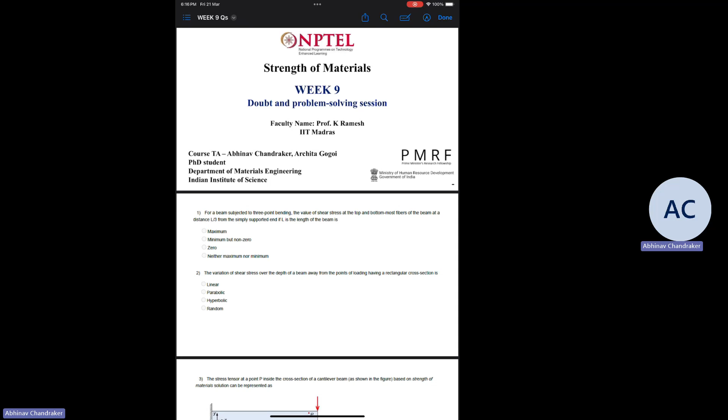In the previous week also, we had seen bending of beams. There we had understood what is the nature of the stresses which develop on pure bending. After that, we looked at addition of shear in bending because that is more realistic - that is what practically always occurs. And we saw how the stress distribution and the strain relationship look when you have both bending and shear.

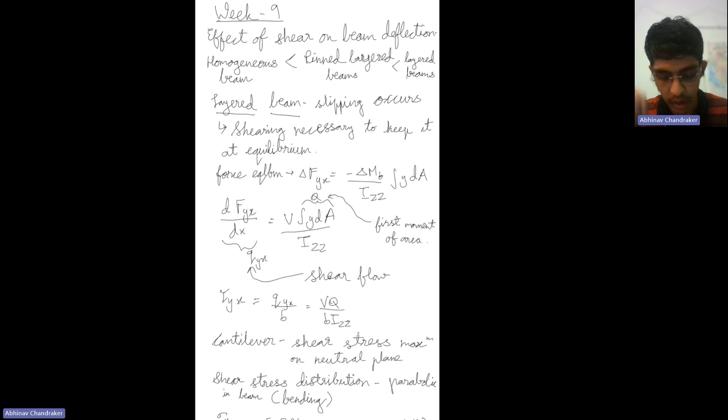There we could see that in case of a layered beam, that is, you have different number of layers all stacked one over the other, the deflection when the same amount of loading is applied is much more compared to a homogeneous bulk beam. If you do some pinning of the layered beams, the deflection is somewhat lesser than that of the layered beams. The reason we have this much deflection is because slipping occurs in between the layers.

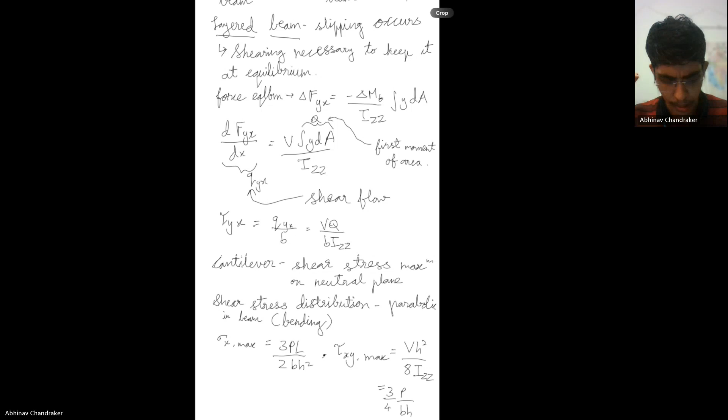We also saw it in the video of the loading which sir had shown. And when we try to look at the forces acting between the layers, it was seen that there is a shear force which is acting between the layers.

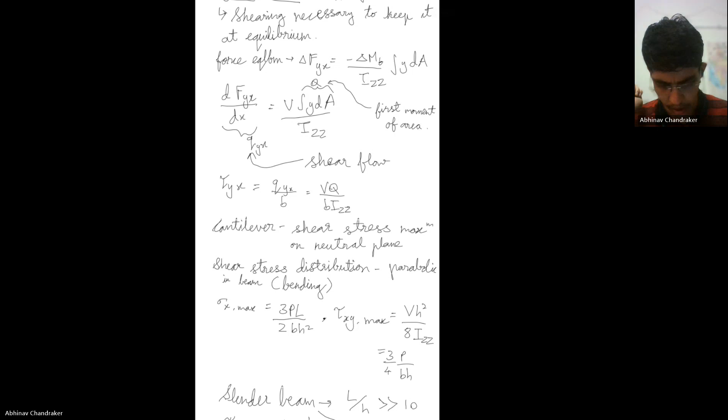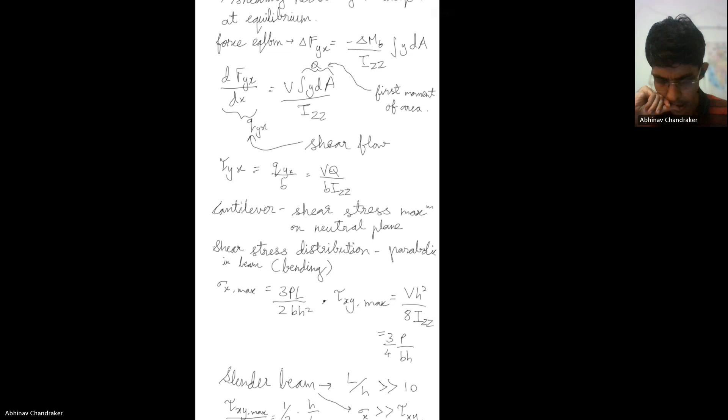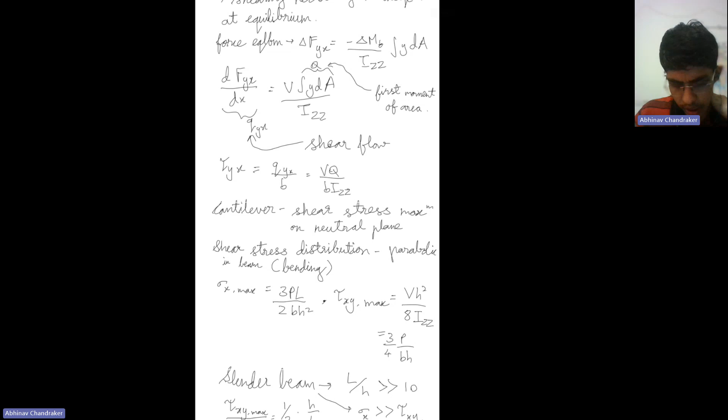It was mathematically quantified by looking at force equilibrium for that shear force. Here I have written down the final expression for the delta Fyx force acting on the y plane in the x direction, which is basically the shear force on a layer.

And it can be related with the bending moment value, Izz, and the integral y dA, which is the first moment of area. Finally, when we do some substitutions, we call dF by dx as q, which is the shear flow - so how sir linked it with the flow of material, how as you change x the force is changing.

And you can also write tau as q by b, where q is this shear flow here, and b is the width of the beam, and this will be equal to... just a minute.

Sorry, I could not write on it. Anyways, so I'll just magnify the concerned area.

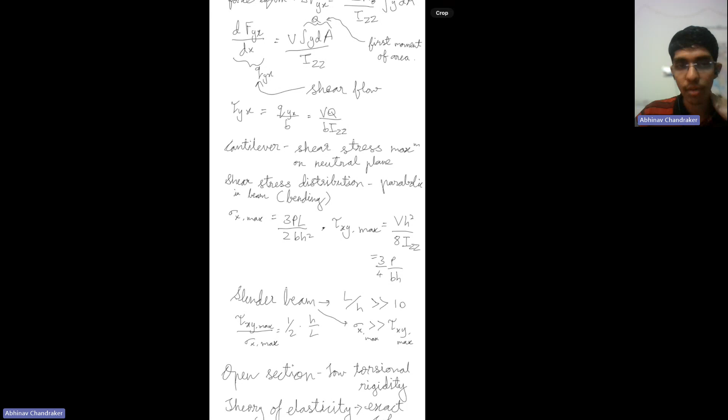So finally, we got this expression tau equal to Q by b, which can also be written as V into Q. V is the shear force acting at that point due to the loading. Q is the first moment of area, divided by b into Izz. I is the moment of inertia, second moment of area.

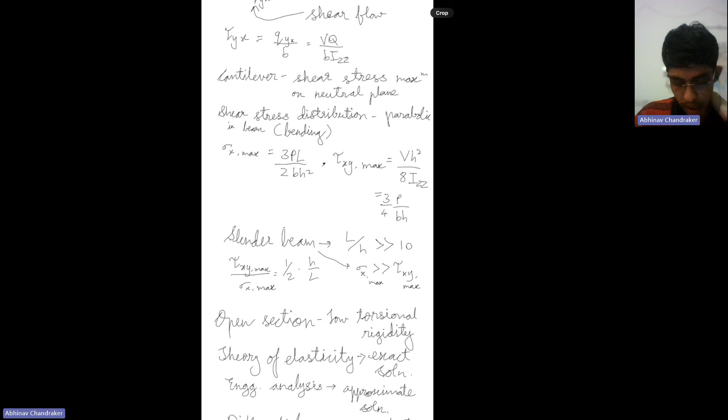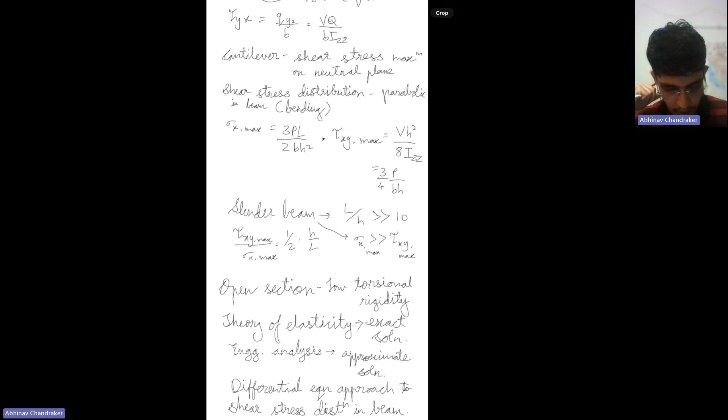So by this we see that in cantilevers we also have a shear stress tau yx, which is on the y plane in the x direction. And this stress will be maximum on the neutral plane. So before also, sir had told that the shear stress distribution will be such that at the surfaces it will be 0 due to free surfaces, and at the middle it will be the highest.

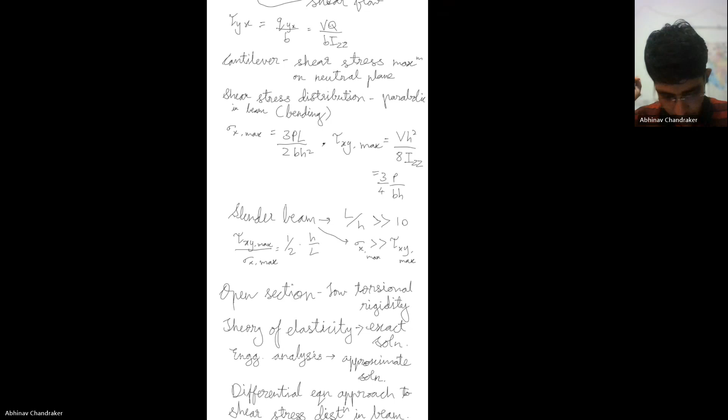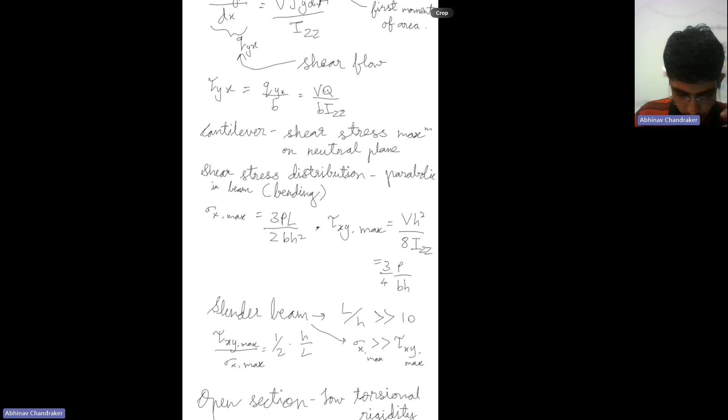And through this relationship, it's not written here exactly what is the relationship, but it's a parabolic relationship. So tau is proportional to the square of the y value. So as you go from the neutral surface or neutral plane towards the top or bottom surface, the value of the shear stress will reduce in a parabolic manner from highest to 0, and the highest value will be Vh square by 8 Izz, which is 3 by 4 into P by BH.

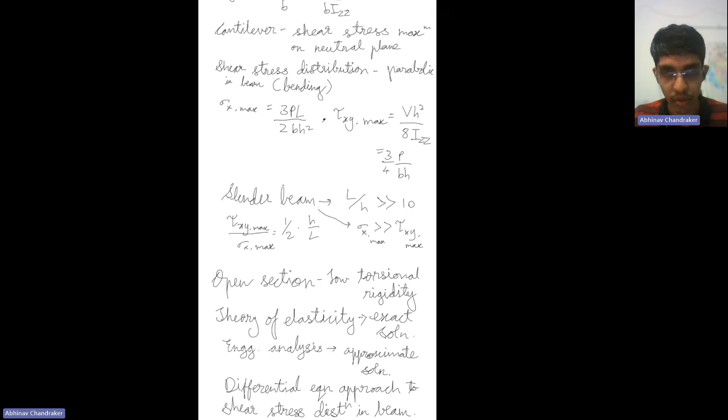So at the neutral plane, we know it's defined in such a way that the axial strain and axial stress are 0. But the shear stress will be highest on the neutral plane. So that you have to understand.

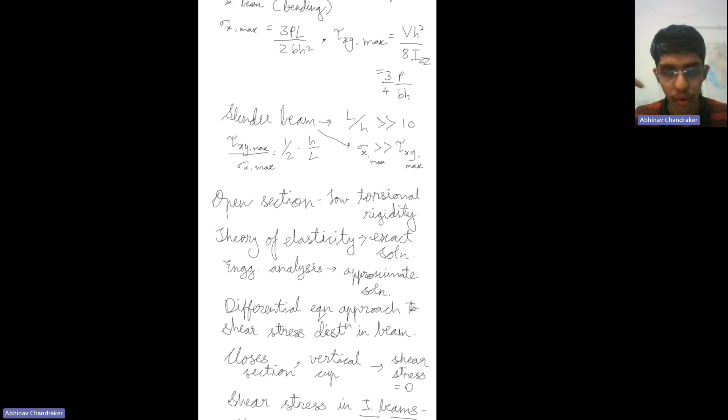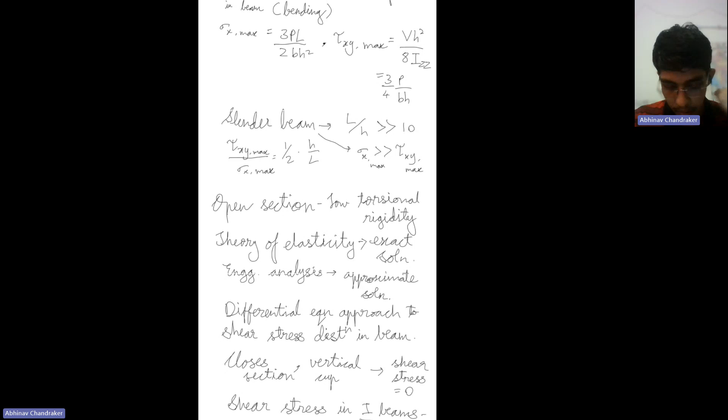And we know that we have all throughout made the assumption of slender beams, so L by H is more than 10. And if we try to take the ratio of the shear stress and the axial stress, it comes out to be H by 2L. So from this, what we can understand is that axial stresses are normally much more than the shear stresses for slender beams, and therefore in most scenarios, axial stresses are more important.

So there are certain scenarios where you have concentrated loads occurring, such as in 3-point bending tests, and near those concentrated loads, shear stresses can play a big role. They can influence the stress contours which are developed.

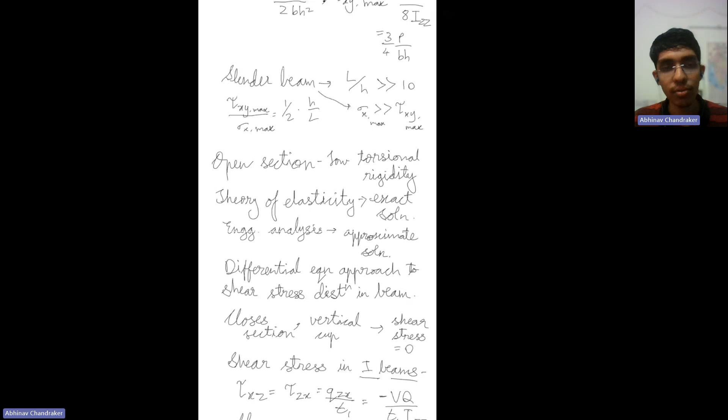Those kinds of sections are called open sections. And if you have something like a rectangular cross section, you call it a closed section. So till now, all this that we saw, especially the shear stress related observations, they were for closed sections. This will also apply to open sections, but in open sections there will be another kind of shear stress which will develop. So till now we were looking at shear stress between the layers, occurring between the layers between top and bottom. But if you have an open section...

Depending on how the section is, I'll try to just write it down. I'll make a rough sketch. So what I was talking about was, till now we looked at more symmetric sections, like maybe this kind of rectangular cross section, or an I beam which has a plane of symmetry, actually two planes of symmetry.

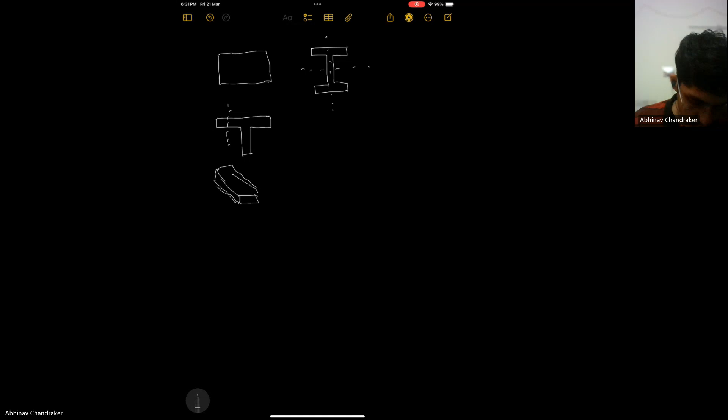But if you have something of this form, then in this case, what will happen if you make a vertical cross section, for example here, then you might have an element like this, or let me... it's difficult to draw actually.

If you do a vertical cross section of this, make a vertical cut, just like we had two different layers stacked horizontally one over the other. If you have them stacked vertically side by side and look at what happens for the closed section, you will see that it will still be the same when loaded.

But if you look at the open cross section and do this activity, one layer will try to shear past the other. There will be some movement occurring between those two, and that happens because shear force develops to maintain equilibrium, since here equilibrium is not maintained. So you have a net shear force developing, acting on this cross section.

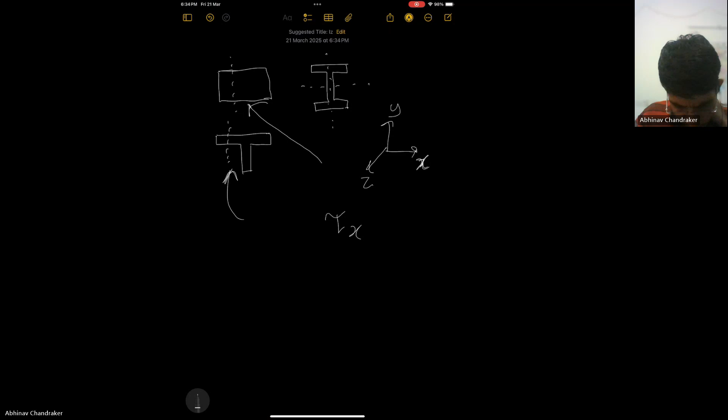Here I am just telling you, and to clarify a bit more, if you have x here as per Sir's notation, y here, and z here, that direction will be tau. So the beam is like this, and you'll have one shear in the x direction on the z plane, so tau zx.

Similarly, this will be the same as tau xz, on the z plane, x plane on the z direction. So these both will occur for this kind of a cross section.

Sir has told what will be the values for this based on force equilibrium, and it turns out to be qzx by T1 in I beams.

Also, I think I said it will be for this one, but it will also occur for the two plane of symmetry I beam, this is a half I beam. So this will occur for both of them.

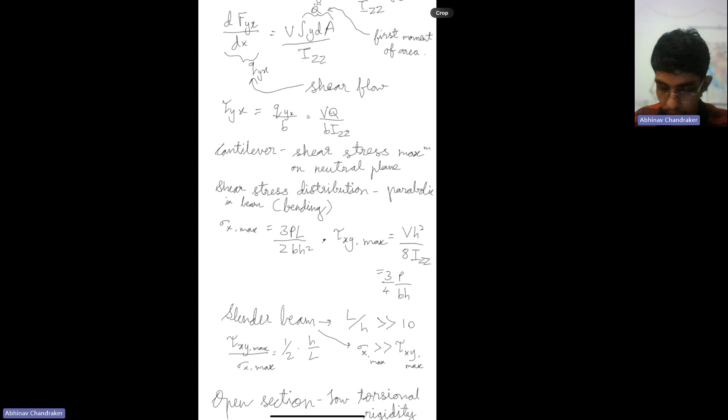We see that at the top it is very low near the flange area, and this is because the area of this is very high. So due to this, if we look at the formula, it's like this: VQ by b into Izz. So the moment of inertia is very high, so tau will be low, and you will have a very small value.

Both still show parabolic nature, so both of these are parabolic. But in the other portion, because the area is smaller and the Izz value is smaller, we'll have much higher tau values. So this is how tau xy will vary for open sections.

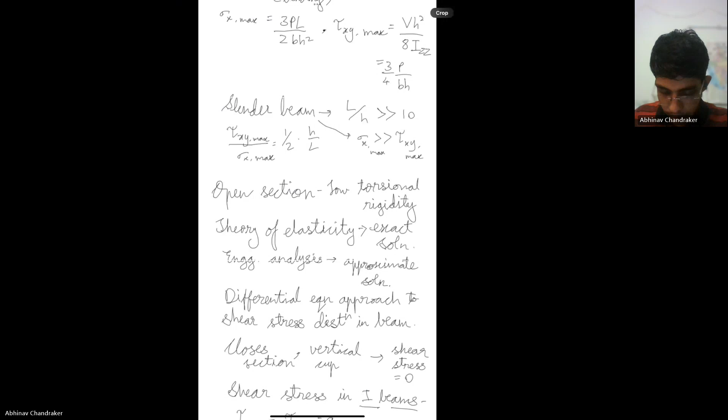All of this was from engineering analysis, which gives you a more approximate and quicker solution, but you can also get a more accurate solution by doing theory of elasticity analysis, which involves writing differential equations and seeing how stresses vary as strains in differential form.

That was also shown by Sir for one of the cases, and it was shown that both tend to give similar values, but in more complex loading, theory of elasticity gives you the accurate solution. So Sir multiple times mentioned that you need to also correlate with experiments which are carefully done, in order to show that your analysis is correct.

So, therefore, due to these stresses, if you have an unsymmetric cross section, something like this - this is the cross section, this is your beam - and you are loading it.

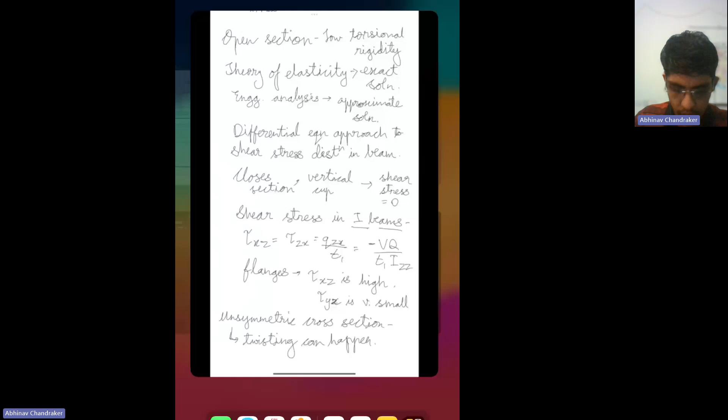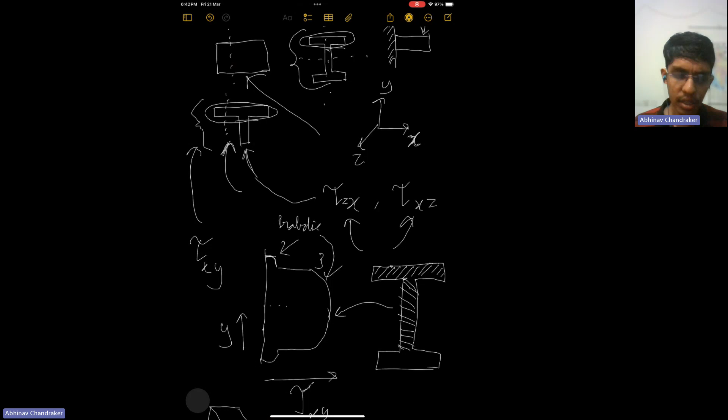So that was all which was covered in week 9, especially in lectures 4 and 5. In lecture 6, he covered some more specific cases like composites, and he solved some numericals and showed how you can develop the relations for composites.

And find out stresses and strains for particular questions. The important thing that you need to keep in mind from this lecture is that in your beam cross section at the neutral plane, you will have tau xy, shear stress, the highest, and the stress state will be 0.

Tau 0 in the 2D plane. Of course, in Z you will not have anything, and if you go near the top or the bottom surface, then you'll have sigma stress, axial stress as maximum, and you will have this kind of state, sigma 0 0 0, and the axial stress is there, no shear stress is present.

That was all from week 9, lecture bending 4 and bending 5. I think now we can move to the questions, since mostly bending 5 and 6 are about numericals for composite materials and different kinds of loadings having different materials of different cross section areas. But we'll just look at some non-numerical MCQs. Archita will cover the more numerical ones in her session.

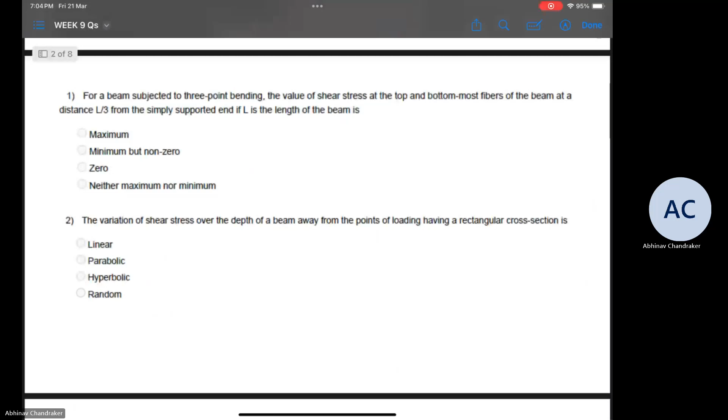So let's start with the questions. First question: for a beam subjected to 3-point bending, the value of shear stress at the top and bottommost fibers of the beam at a distance L by 3 from the simply supported end, if L is the length of the beam, is?

So we have 3-point bending here, but we can still simplify what is being asked in this problem. There will be certain shear stress and bending moment occurring at the point L by 3 mentioned here, in which we are interested.

But we know that tau xy, the shear stress acting on the x plane in the y direction, will be parabolic, and it will be zero at the surface, that is at the top and bottom.

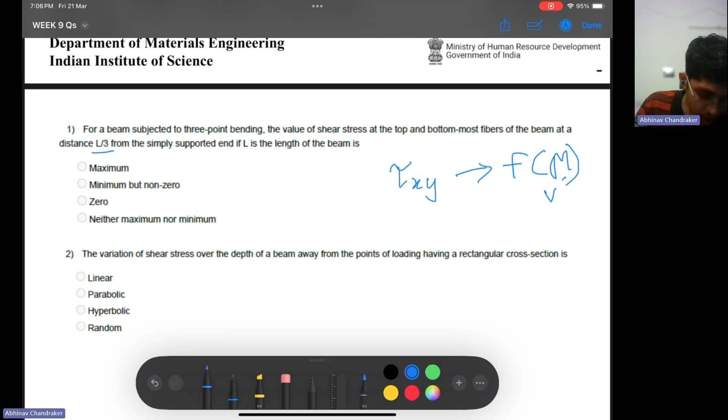Next question. The variation of shear stress over the depth of a beam away from the points of loading having a rectangular cross section is?

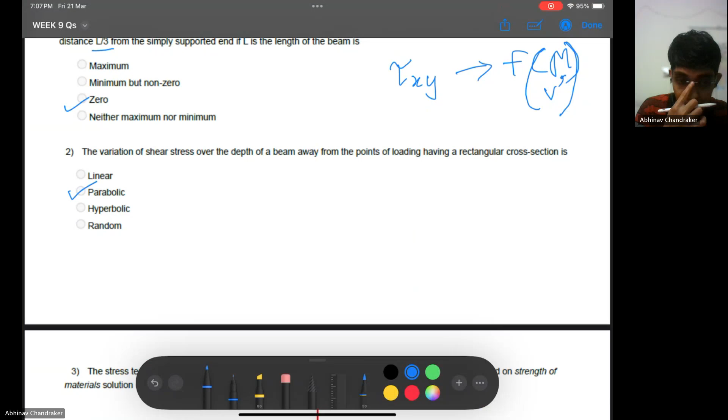So we have seen this also. The relationship is parabolic. The exact relationship you can check in sir's video lectures. It is somewhat proportional to h by 2 whole square minus y square. So at y equal to h by 2, it is 0.

At y equal to plus minus h by 2, tau equal to 0, and at y equal to 0, here y is being measured from the neutral plane. So on the neutral plane, tau is maximum, and the relationship is parabolic, since you have the integral y dA by I term here. So if you simplify it, you will see that it is parabolic. Let's go to the next question.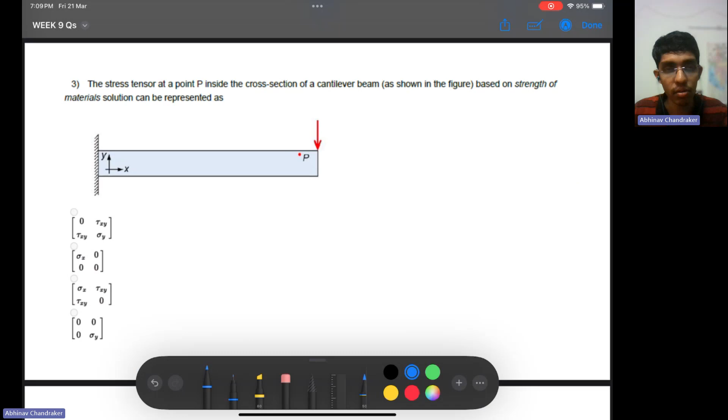So we have already told that at the top we have zero shear stress, in the middle we have highest, but in the middle, that is at the neutral plane, we have axial stress equal to zero, and in between we have both axial stress which varies linearly over y, and shear stress which varies parabolically over y. So the correct answer will be this: sigma y will be equal to 0 as per strength of material solution. Exact solution might have some value of sigma y also.

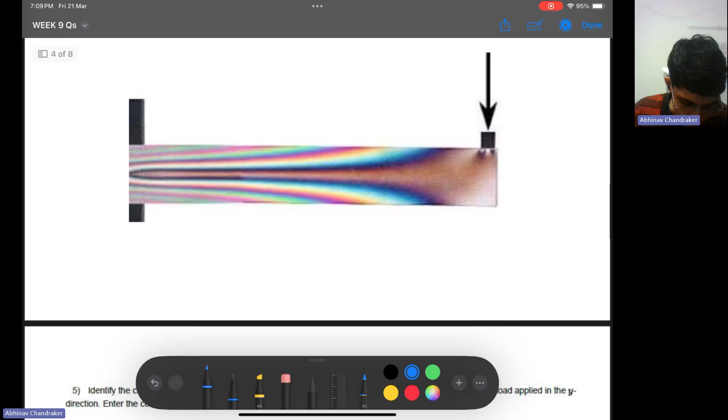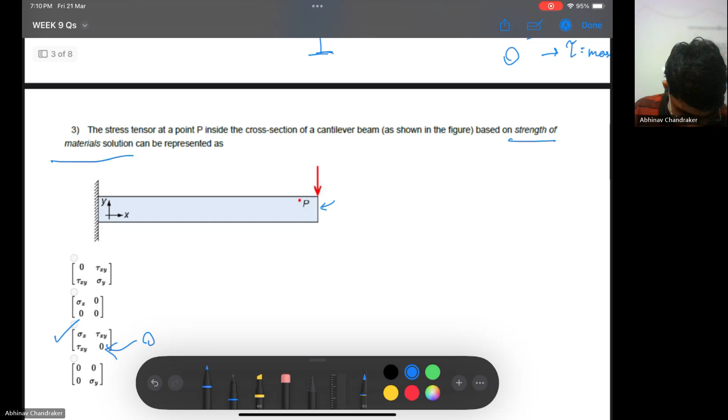Also, we can see here that this is an image of a photoelastic material, a photoelastic beam which is being loaded like a cantilever. So one end is fixed and the other end is loaded, and we are seeing the fringes which are occurring, which are isochromatic fringes. That means sigma 1 minus sigma 2.

The difference in the principal stresses is being shown in these fringes, and we see that near the fixed end you have a higher concentration of fringes, while near the loading end you have very less stresses occurring. This is because the bending moment is highest at the fixed end and lowest at the loading end. So the axial stresses are also highest at the fixed end. That's why you have this kind of situation.

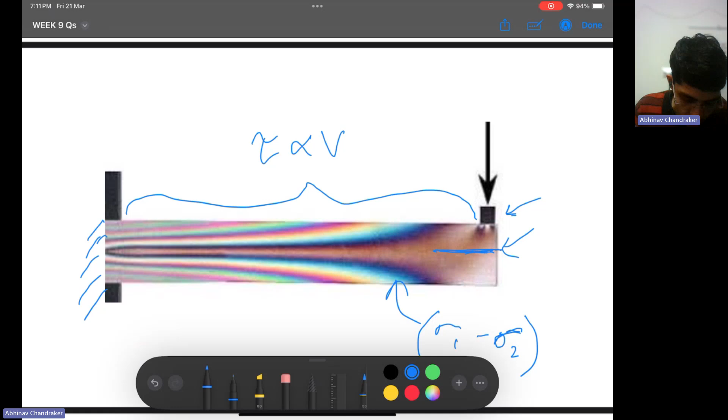And we know that tau is proportional to V, the shear force, which is constant over the whole of this. So tau will be constant over the whole of it.

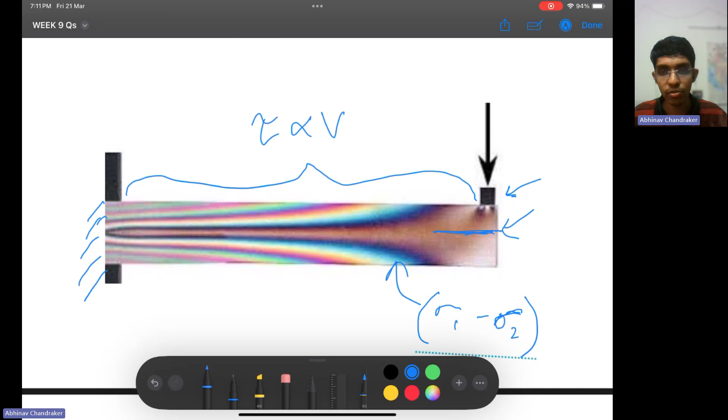Also, since we have quite a lot of time right now, nobody has joined, so there are no doubts to discuss. Usually, earlier it used to take more than 2 hours to finish due to the multiple doubts that were there, but this time there aren't any. So I'll use this time to just look over the parabolic equation, which has come multiple times in the assignment, also how it was derived.

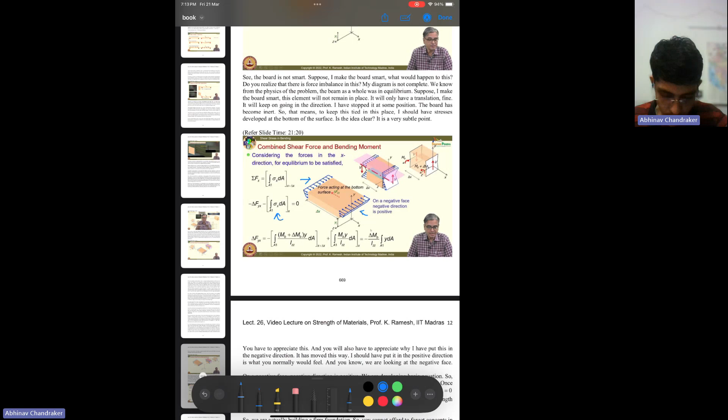So force equilibrium was done. The difference in axial stresses in two directions was written down, and it was converted to moment because we know the value of moment.

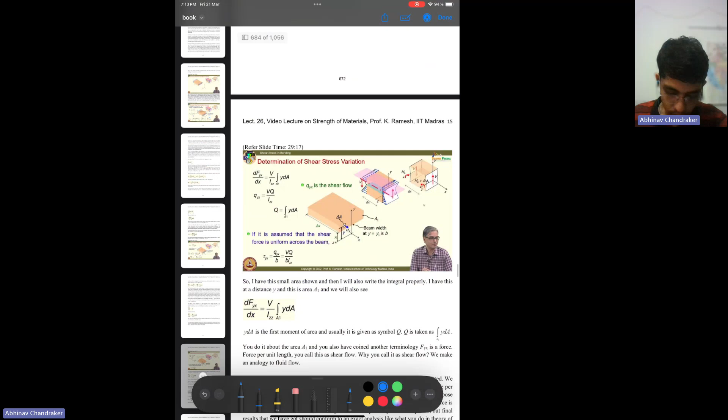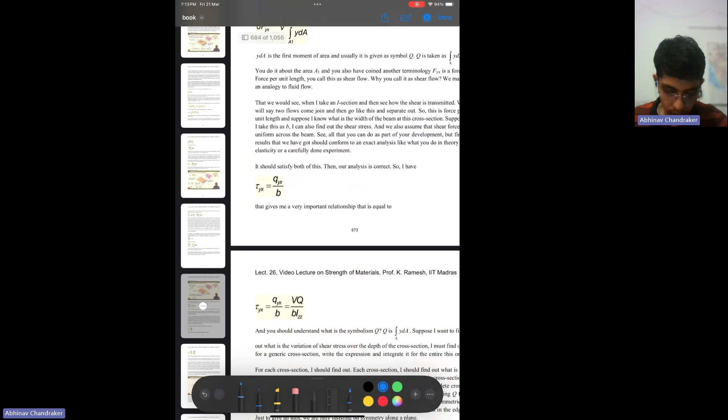And since we are interested in dF by dx, we can do differential of moment to get the shear stress value, and this will give you the shear stress value. To get this, the shear force experienced is V, and when you divide q by b - q is your shear flow, dF by dx - when you divide it, you get shear stress. It's something like this.

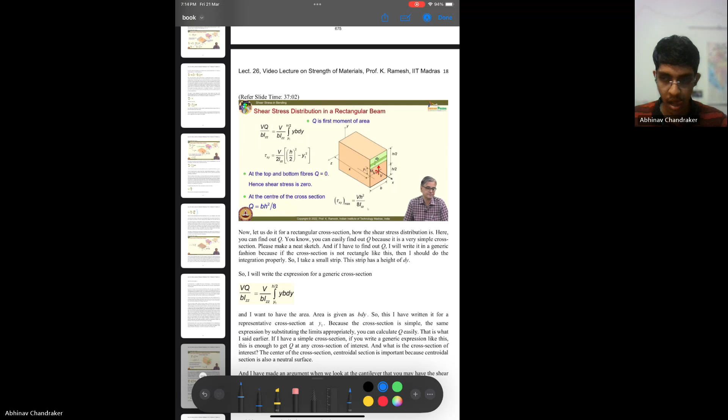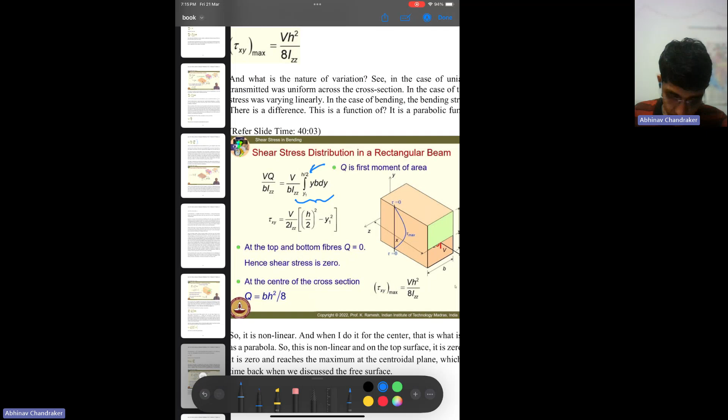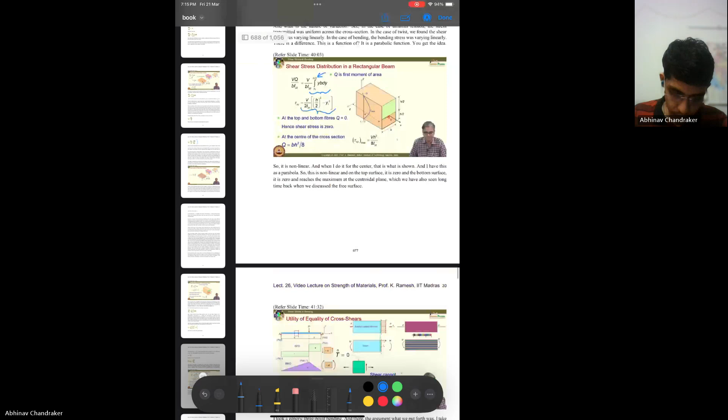And let's also look at stresses, tau at tau zx. So stresses in the z plane for open sections.

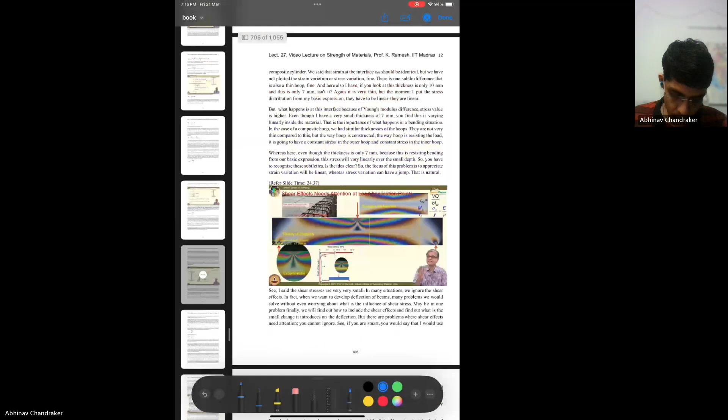So I was talking about closed and open sections. If you have a closed section, you have a moment, you have axial stresses like this. On the top you have tensile - let's say tensile, or in case of cantilevers, yes tensile - at the bottom you have compressive stresses. In this, it's at the top compressive, bottom tensile, and both of these are cancelling each other due to this neutral plane which is passing through. So for the closed section, the net axial stress in the x direction is 0.

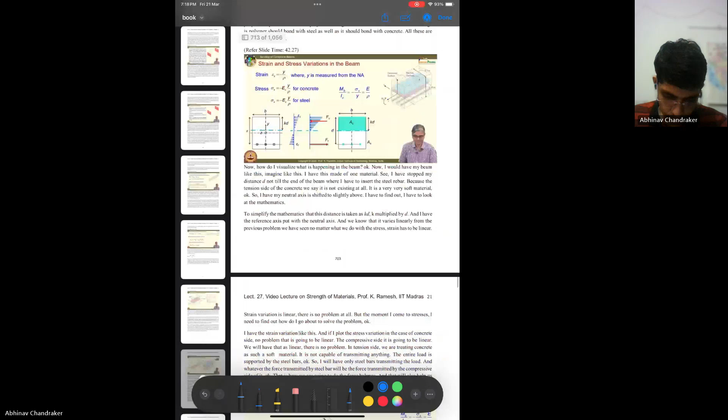Yeah, so I think that explanation is enough. Now let's move back to our questions. Yeah, next question is question 5.

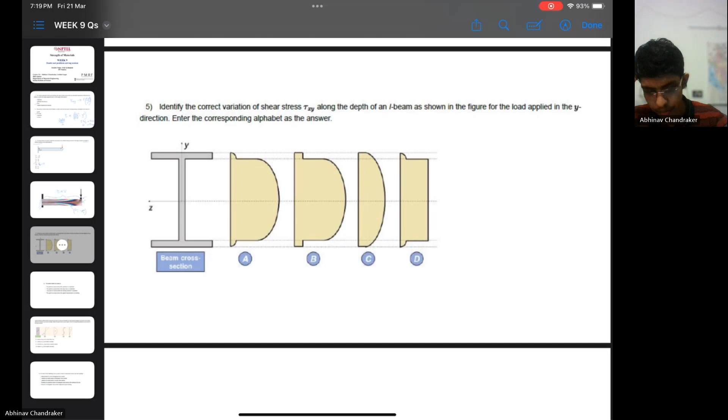Identify the correct variation of shear stress tau xy along the depth of an I-beam as shown in the figure, for the load applied in the y direction. Enter the corresponding alphabet as the answer. We know that tau equal to V into integral y dA by b into I zz.

From this, sir has already shown that if you have this kind of I beam, then at the top region, the area is much higher. Maybe I'll go to the concerned part in the book where he shows the diagram for explaining.

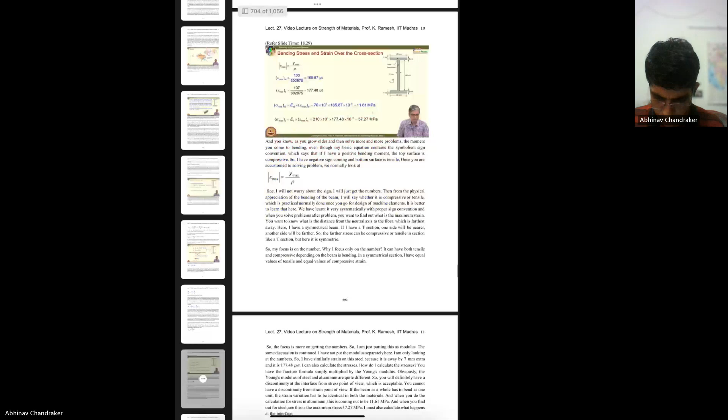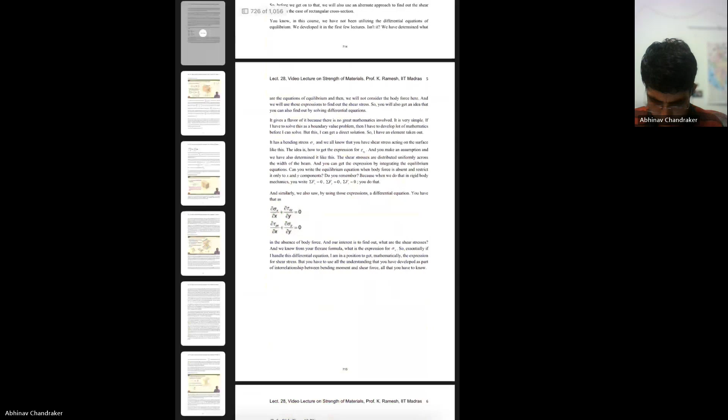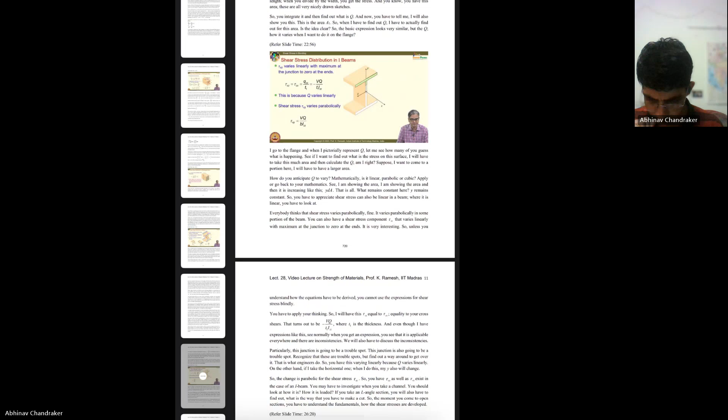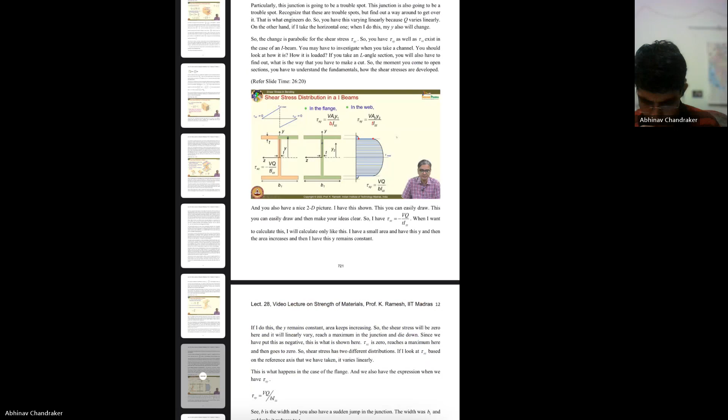So here sir has shown that in the flange you have this value, V A1 Y1 by B1 into I zz, and in the web you have this value. So we know that B1 is much higher than T, the thickness here at the web.

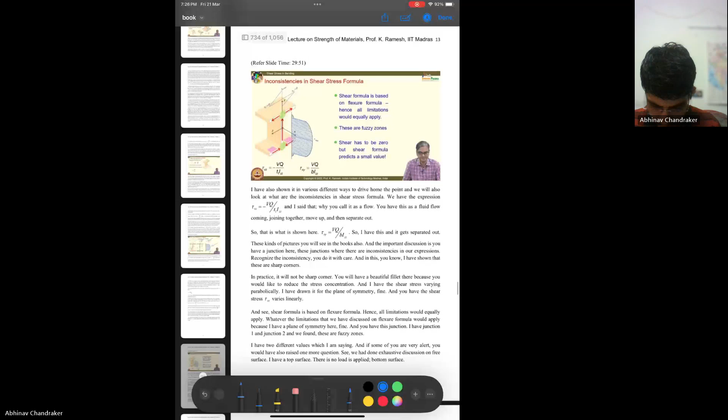It's because of the width being encountered at the flange, which is B, and at the web it is T1. And because B is higher, tau xy will be lower at the flange, which you can see here.

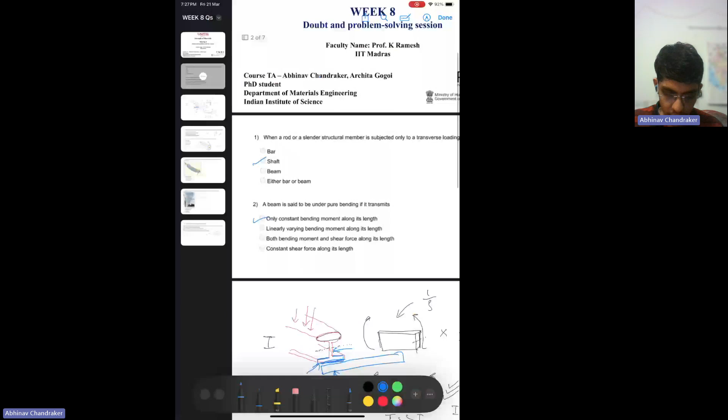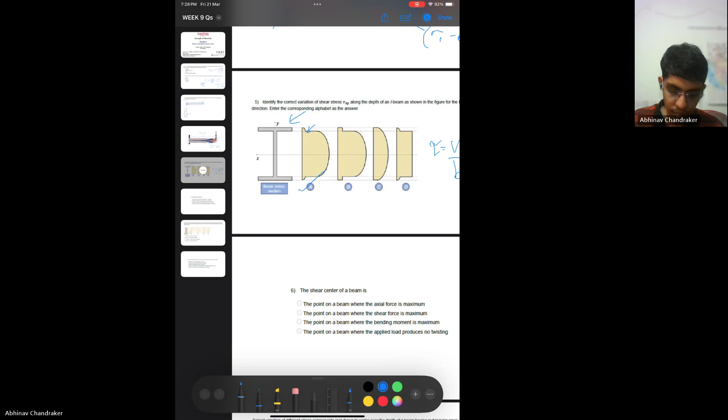The next question is: the shear center of a beam is. A shear center means it's a point on the beam about which, if you load, there will not be any twisting taking place. So because there is no twisting, you say that is the shear center of the beam. So if no twisting takes place, it will be the shear center. So the correct answer is D.

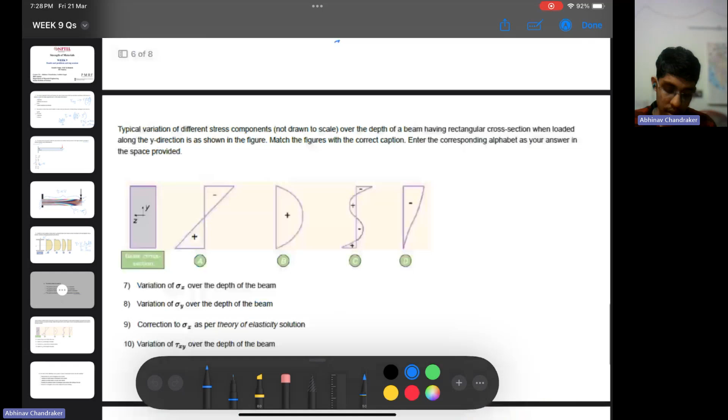Next question. This shows variation of different stress components over the depth of a beam having rectangular cross section. So what will be the variation for different stress components. First is sigma x. We know that sigma x varies linearly. It should be A. Sigma y...

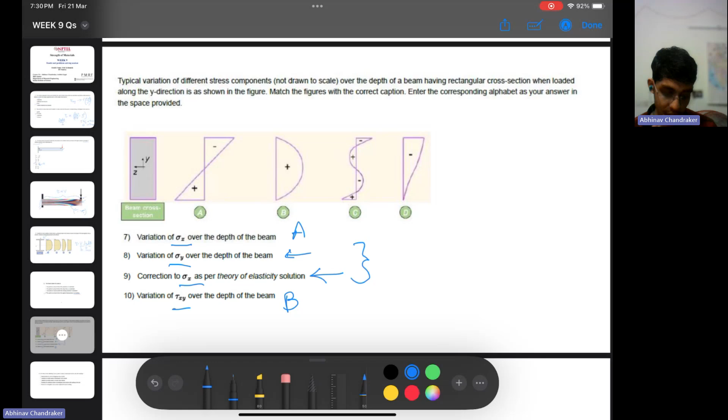We'll see this later. Next is correction to sigma x as per theory of elasticity solution, we'll see this also later. And next is tau xy over the depth of the beam, we have seen this, it's parabolic, so it's B. Now for these two, as per strength of material solution, sigma x should have a variation of A, and sigma y should have a variation of 0. But if you consider the exact stresses occurring, there will be some differences. Sir has already mentioned this in his previous lecture. I'll just open that part and we'll see it in more detail what the distribution should be.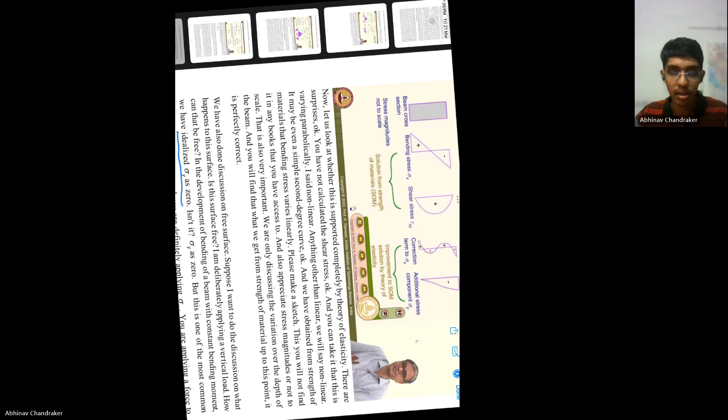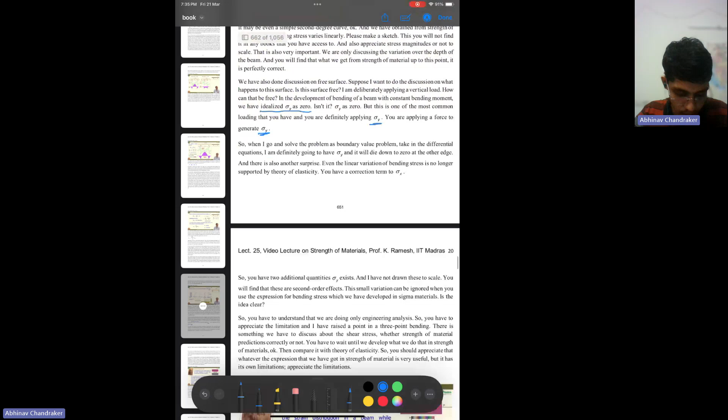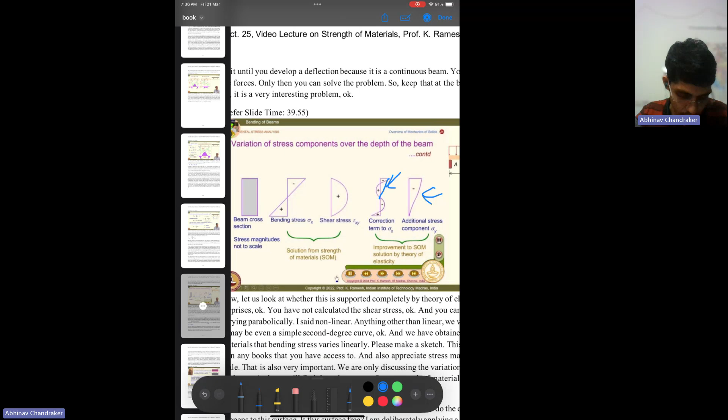So as I was saying, because we have loading in the y direction, we should expect some value of sigma y, and it will be like this if you use theory of elasticity. And even sigma x will not be totally linear. The actual one will be something like this. So instead of being like this, it actually follows something which is like this in real life.

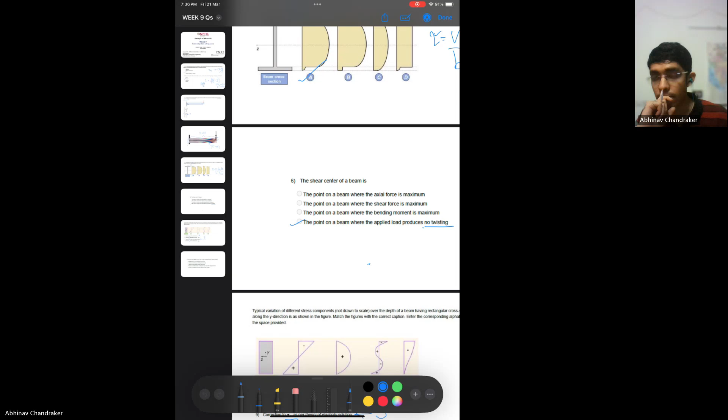So if we go back to our question, this is because of second order effects, because we have shear stresses also, which we earlier were decoupling with the bending moment, but you cannot decouple it like that, because those also have some effects. So that is why we have this kind of change. The correct answer to question 9 will be C, to question 8 will be D.

Coming to the last question: for which of the following cases plane sections remain plane before and after loading? For axial tension of a rod of hexagonal cross section, it should remain plane because you are having uniform elongation.

Twisting of a shaft having circular cross section - here we have seen that the planes still remain planes.

Bending of a cantilever beam of rectangular cross section with loading at the end - here we have seen that it would have been plane still a plane, but because of loading at the end, there is also shear force, and in that case the assumption of plane remaining a plane is not true. It might become curved, so this is false. But in the last option, you have pure bending, and there this assumption will hold. It will still remain a plane. We have seen this in Sir's lectures.